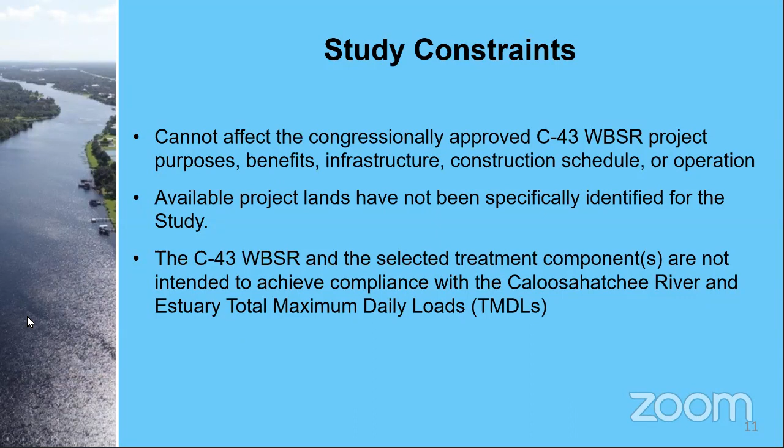They also must be compatible with the objectives of the C-43 West Basin Storage Reservoir project. The working group and consultant team have identified some constraints to keep in mind as the study moves forward. The identified alternatives cannot affect the congressionally approved C-43 reservoir project purposes, benefits, infrastructure, construction schedule, or operation. Also, project lands have not been specifically identified for this study.

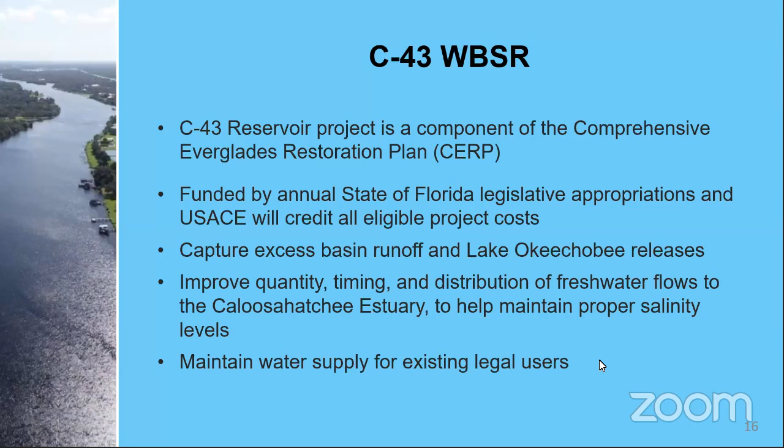Next slide, please. For those who may not know where the reservoir project is located, it's roughly halfway between the Ortona Lock to the east and the Franklin Lock to the west on the Caloosahatchee River, just on the west border of Hendry County, outside of LaBelle.

It's a 10,000 acre reservoir project, a very large earthworks and dam project, with above-ground storage that will take water out of the Caloosahatchee River through the Townsend Canal. There's an existing water supply canal that serves the existing farmers in that area. At certain times of the year, when the river and estuary call for it, water stored in the reservoir will be discharged back out into the Townsend, then back into the river and through the lock at Franklin into the estuary.

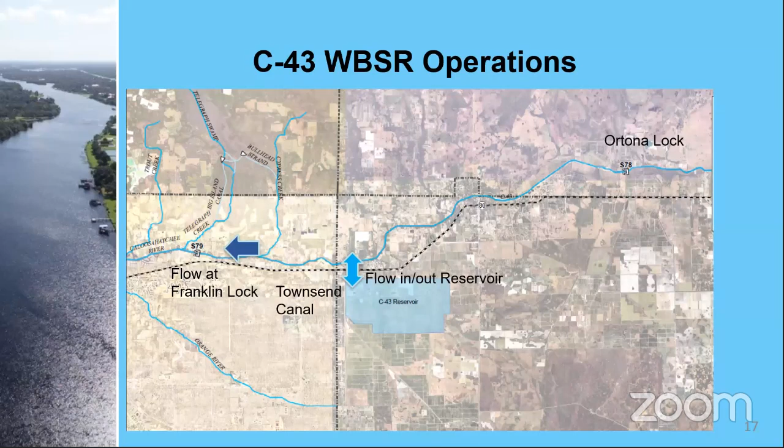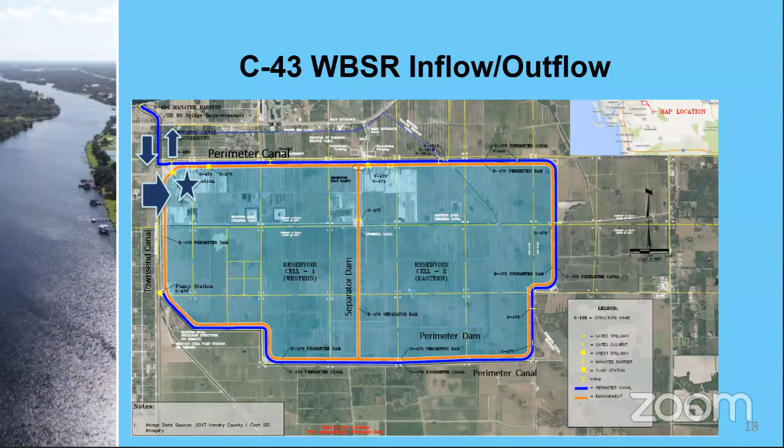As the estuary calls for those water needs, water is discharged out of each of the two cells along the perimeter canal bordering the northern portion of the reservoir, then back into the Townsend and back out to the river. Next slide, please.

To recap, some of the major constraints are the Lake Okeechobee operations schedule, as well as the Caloosahatchee estuary minimum flows and levels established at 457 cubic feet per second, which is the design discharge out of the reservoir back to the river. It's operated to store that excess basin runoff and Lake Okeechobee releases, with the purpose of maintaining salinity levels in the estuary past the Franklin Lock, which the Corps of Engineers calls S79.

We'll fill it during the wet season on average and discharge it during the dry season on average, and those discharges and inflows will be based on the flow conditions at the S79, or Franklin Lock, facility.

The inflow capacity of the pump station is 1,500 CFS, that's how much water we can fill into the reservoir. Given the size of the reservoir, at 1,500 CFS we'd be filling about 3 inches per day during the wet season. In emergencies we can discharge up to 2,500 CFS, although standard normal outflows are to meet the MFLs at about 450 CFS.

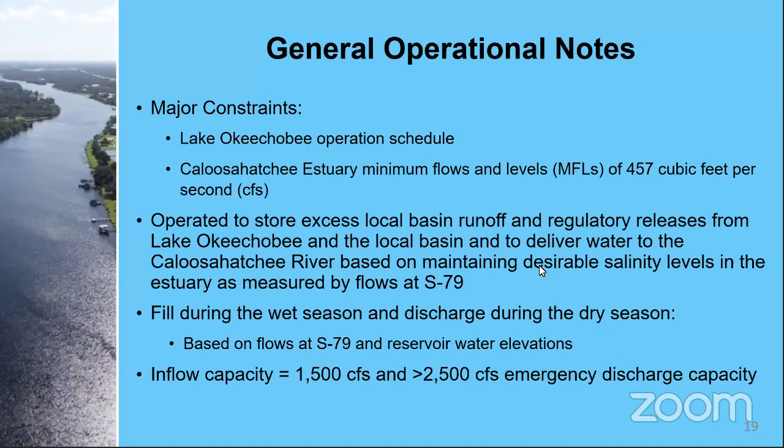Next slide. To answer Matthew's question, the reservoir construction contract was issued in June of last year, and the anticipated contract substantial completion date is December of 2023.

So I think at this point, I'll turn it over to Chris, and he'll start going through our list, beginning with constructed treatment wetlands.

Thanks, Jim. The first technology, as Jim mentioned, is constructed treatment wetlands. These are large created marshes that are designed to naturally improve water quality. They've been used pretty extensively throughout South Florida, and you might have heard of them in various locations referred to as stormwater treatment areas or filter marshes. They reduce nutrient concentrations by consuming nitrogen and phosphorus for the growth of the wetland plants that reside within these impoundments. And also, those same nutrients are used as energy sources for a variety of microbial processes.

There are a number of successful applications of this technology in Florida, and they're widely used across the world. We're fortunate to have very robust operational data sets from large-scale systems within this particular region of South Florida that we can use to guide the design process should these rank highly for this feasibility study.

The general removal efficiencies range from about 20 to 40% for total nitrogen, 75 to 90% for total phosphorus, and over 90% for the suspended algal solids that Jim talked about.

As these are one of the natural technologies, as Jim mentioned, they require large land areas and therefore have correspondingly large capital costs associated with land acquisition and construction. However, also as Jim mentioned, they typically have lower operations and maintenance costs than some of the conventional technologies that you'll hear Jim describe in a few moments.

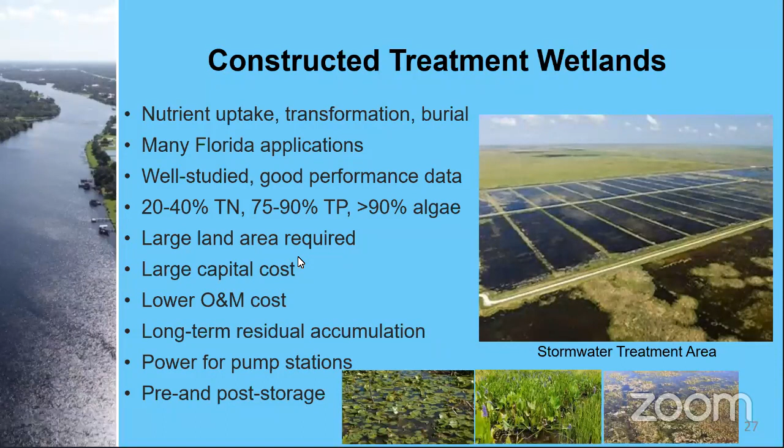Sand filtration is another passive type technology that relies on the gravity separation of particles such as algae and suspended solids in the water in the C-43 or the Caloosahatchee River, by forcing that water to drain through a bed of sand or similarly sized media. Sand filtration is considered passive or a natural technology because other than pumping, it doesn't require energy or chemical inputs for it to work.

There are a number of applications of this technology in Florida, with the largest currently under construction for a phosphate mining facility in Central Florida. Removal efficiencies in a sand filtration system are comparable to the constructed wetlands for nitrogen removal in the range of 20 to 40%. They're a little lower for phosphorus at 25 to 50%, but they're really good for algae removal and suspended solids removal at better than 90% removal.

Similar to the constructed treatment wetlands, sand filtration systems would require large land areas and therefore would have correspondingly large capital costs for land acquisition and construction. Again, similar to the constructed treatment wetlands, they have lower O&M costs than most of the conventional technologies we'll describe. And those O&M costs are related to pumping and periodic replacement of the upper sand layer every several years.

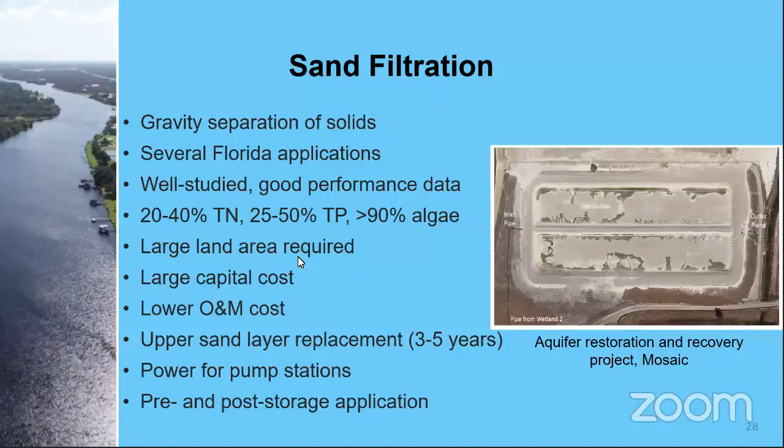Again, this is another technology that can be used to treat water on the way into or the way out of the reservoir. Next.

This next technology is aeration or air diffusion system, and a difference between this and the previous two is that this is one that would be implemented within the storage reservoir itself. Aeration can be used to reduce algal populations through physical mixing and supplying dissolved oxygen to reduce stratification in the water column and minimize the release of nutrients from anaerobic sediments.

There are a handful of applications of aeration in lakes and reservoirs in Florida and a much larger number across the United States. Removal efficiencies range from about 50 to 75% for the nutrients nitrogen and phosphorus. Because this is a technology that would be employed within the reservoir itself, there would be little additional land required to house the blowers and the control systems that would operate the system.

One substantial benefit of aeration is that it does not create any residuals that would require eventual removal and disposal from the reservoir. It's anticipated that an aeration system would have a moderate capital and operations and maintenance cost, with most of that O&M cost associated with electrical power to run the blowers. Other O&M requirements would include annual maintenance of the blowers, the compressors, and the diffuser heads themselves in the bottom of the reservoir. And again, this technology is applicable within the reservoir itself.

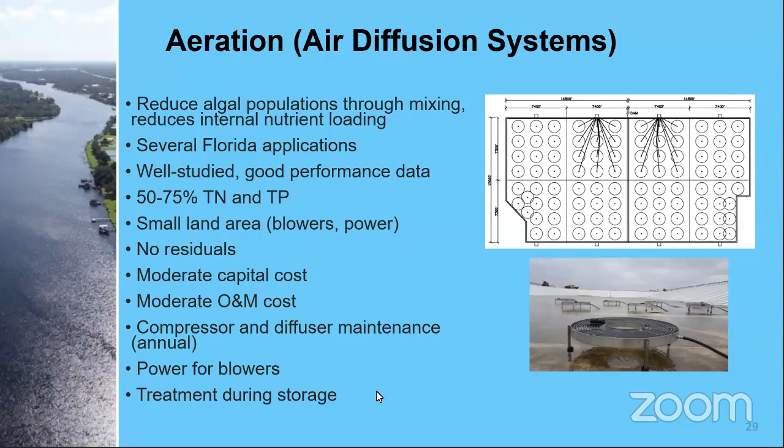The last one that I'll describe is something that's referred to as a hybrid wetlands treatment technology, and this is a nice transition between the three that I presented previously and the technologies that Jim will carry on with, in that it combines the physicochemical processes of coagulation with the natural settling and nutrient uptake processes that occur in treatment wetlands. So in this particular case, a coagulant such as alum can be dosed into the water column and mixed to bond with the nutrient ions, but then form particles that are settled out in the wetland basins.

There are several successful applications of this particular technology in Florida, mostly within the northern Lake Okeechobee watershed, where they've been focusing on treatment of water in tributaries to the lake that are highly influenced by agricultural operations. These have been very well-studied systems and have robust operational data from which we can go forward to the feasibility study.

Removal efficiencies for the hybrid wetlands technology range from about 50 to 60% for total nitrogen, 80 to 90% for phosphorus, and about 90% or more for suspended solids.

In part because they're enhanced or intensified through the use of chemicals, they would require a slightly reduced land area when compared to a more conventional constructed treatment wetland system, and therefore would have reduced capital costs associated with land. The requirement for chemical addition, however, increases their O&M costs relative to treatment wetlands and sand filtration. They do generate residuals, a solids, a flocculent material that would require periodic removal and disposal from the settling basins.

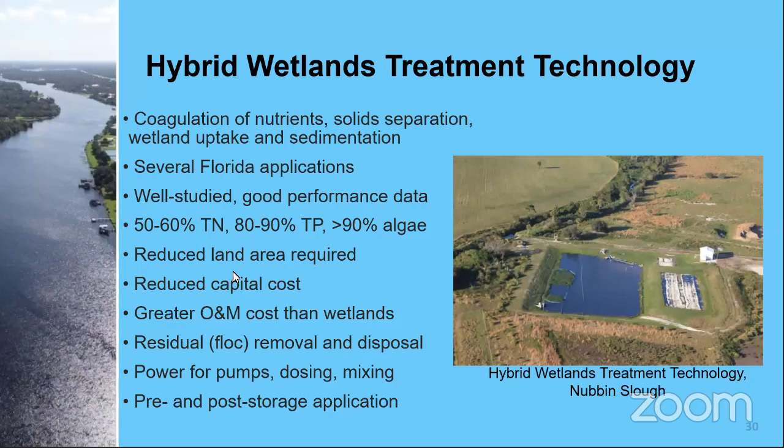Okay, well, the other technologies that, like Chris mentioned, speaking to coagulation, involve a more dedicated facility where an offline or an online treatment system is established. In this case, we're using the addition of a metal salt or a coagulant to change the particle charge of particles within the water column itself and encourage the growth of particle size and their sedimentation rates.

This is a common approach for treatment of drinking water supplies, as well as a reduction of phosphorus and nitrogen from advanced wastewater treatment systems. In our case here, these would be either as an offline system treating water coming in or within the reservoir itself. The multiple Florida applications shown here include one large-scale facility in operation in Lake County, Florida, the nutrient reduction facility.

These are well-studied systems. There's over 30 years now of treatment using alum injection in Florida, lakes and reservoirs and stormwater systems. And these have been built for fairly large flows, like the one shown here.

The nitrogen removal is significant, typically we see 50 to 70%. For phosphorus, it's even better, 50 to 90%. And solids reduction is also equally high, over 90%. These chemical processes react quickly, so we don't need much land area for the treatment process, but there is land required to settle out the solids and collect and store them until solids processing can take place.

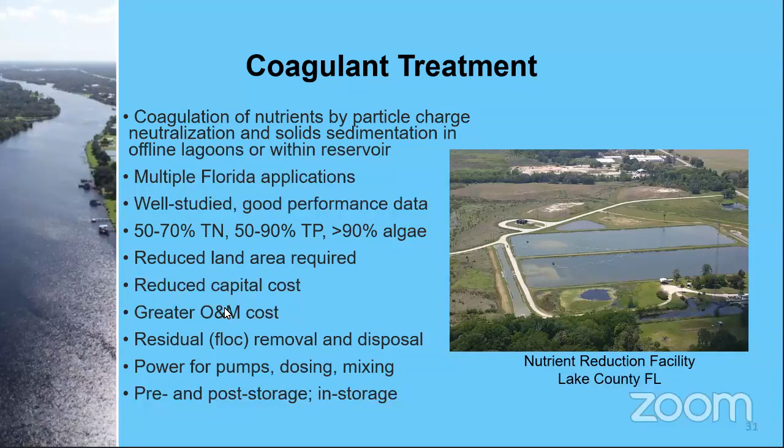Let's go to the next slide. So in the reservoir itself, in addition to aeration, there's an opportunity to control the algae directly.

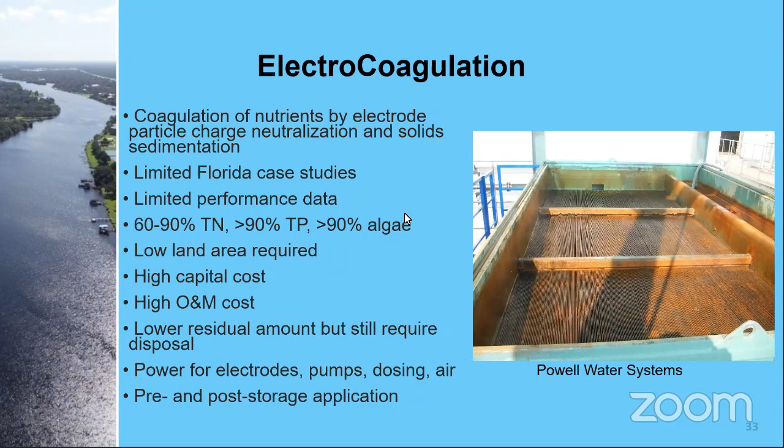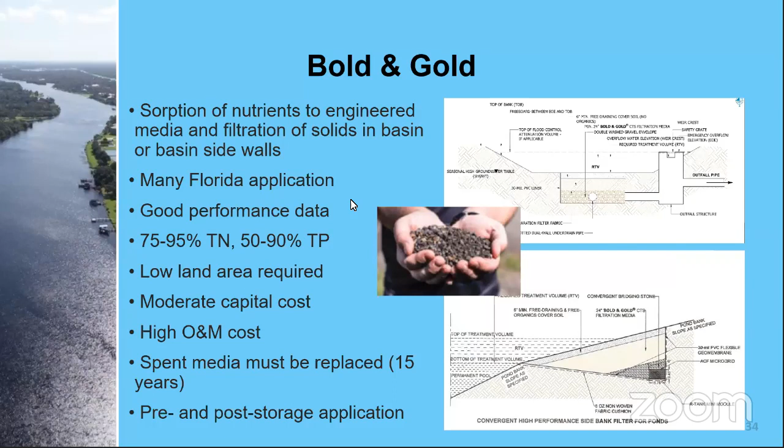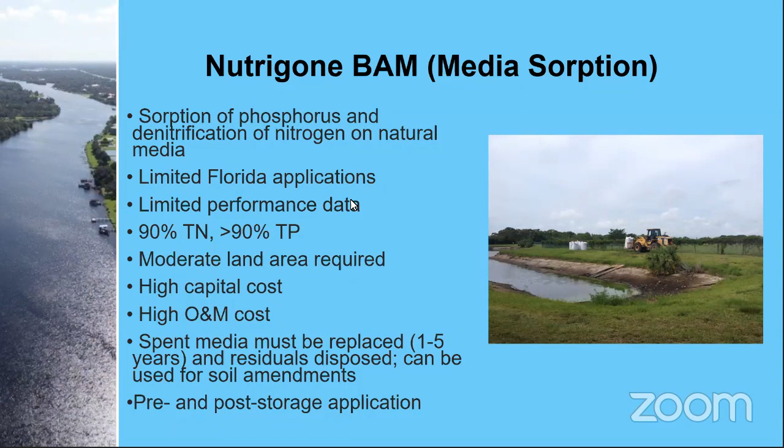And finally, there's the AquaLutions approach. This is a technology that's a combination of chemical addition to coagulate algal solids, followed by dissolved air flotation to separate the coagulated solids. The outgoing product is very clear water with low nutrients. Several pilot studies have been conducted in Florida, the most notable being a 5-year study treating water from Lake Jesup in north central Florida. Available data from that project and tests by the district have provided a reliable performance basis.

Nutrient reductions of 65% total nitrogen, 90% phosphorus, and 80% algae reductions were achieved in that study. The treatment system operates within a relatively compact footprint, so the land area requirement is not great. The capital and O&M costs are relatively high, given the chemical and mechanical components. As with other solid separation techniques, a large volume of solids is produced that must be dried and disposed of.

In lieu of landfilling, because the residuals do contain nutrients, the vendor promotes their use for fertilizer pellets, but they can also be burned as well. Another factor to consider is the power cost to operate the mechanical components, including pumps, air compressors, and solids management systems. This technology would potentially be suitable for pre and post storage.

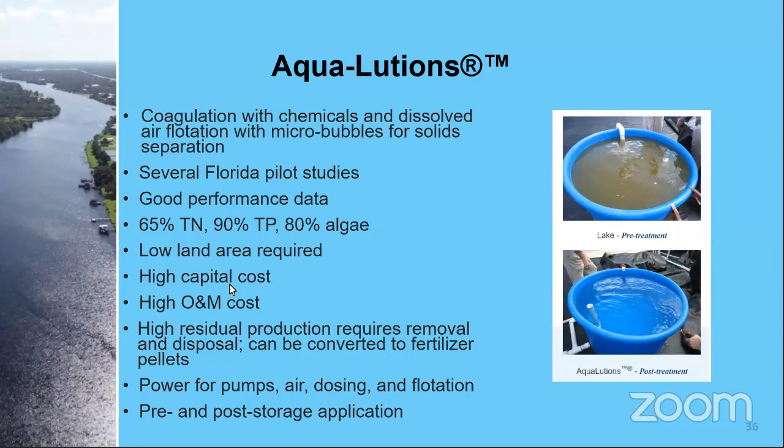So that's the overview of our relatively short list of technologies. Are there any questions about any of this material that we presented?

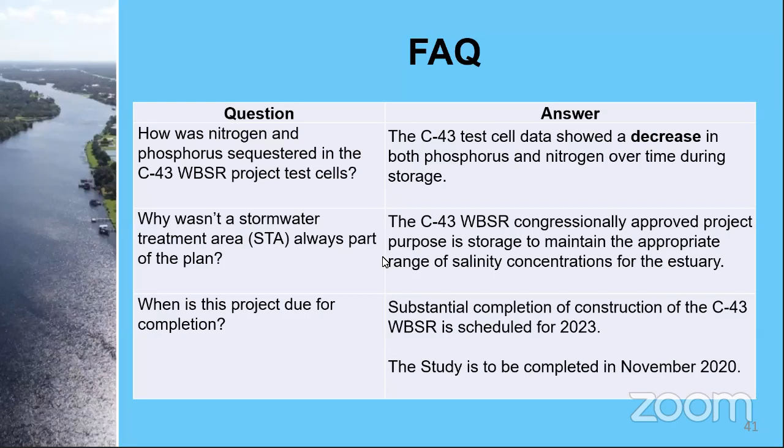The next question is about the TMDLs. The total nitrogen TMDL load reduction was set for the entire Caloosahatchee River and estuary watershed. Any reduction in nitrogen from the water stored in the reservoir or associated water quality feature will be included as part of the overall reduction for the watershed.

How large an STA is needed to treat the volume of water released from the reservoir? Approximately 5,000 acres of land is required for that volume of water.

Will the reservoir be lined? The reservoir is not lined. The bottom of the reservoir will remain native soils, and Sean discussed that earlier.